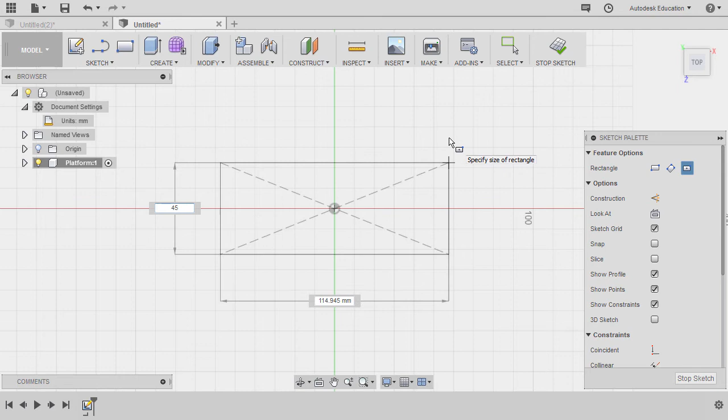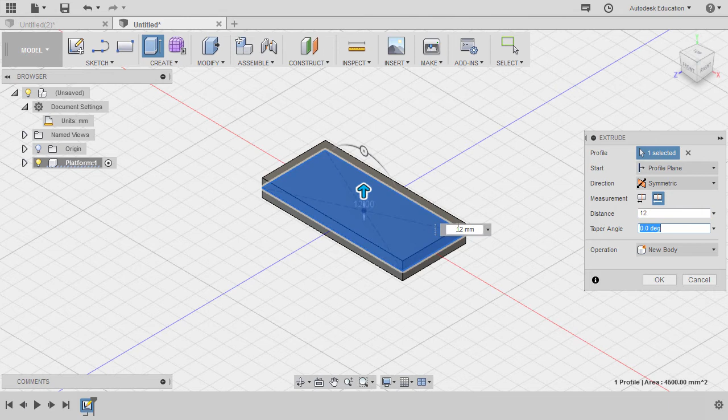Changing the rectangle type to center. Let's drop our center point at our origin. Keying in 45, hitting tab, 100, hitting enter, and hitting E for extrude. Let's select this profile. For direction, let's select symmetric, and for the whole length, it will be 12. Operation new body, hitting OK.

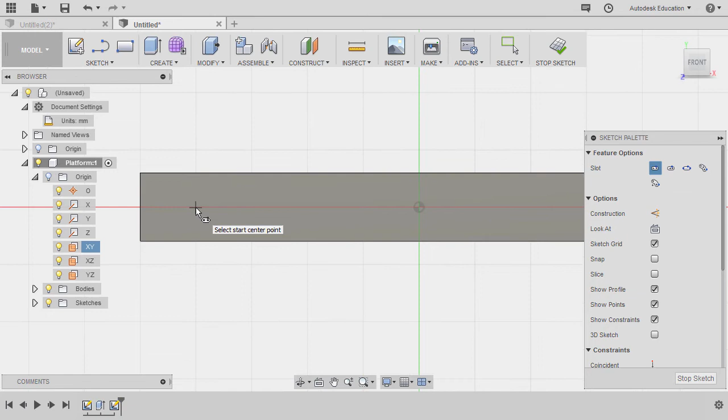Let's sketch on our XY plane. Going to XY, right click and select create sketch. Heading to sketch, let's select center to center slot. I'm going to create our slot here. Left click, and left click. Hitting escape and hitting D to grab our dimension. I'm going to select this point and this point. Key in 25, hitting escape.

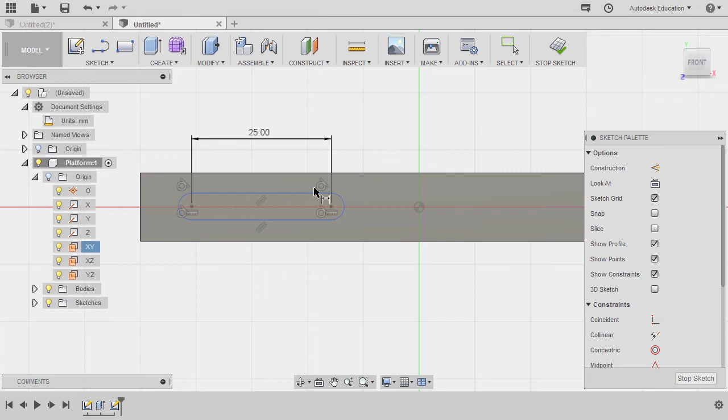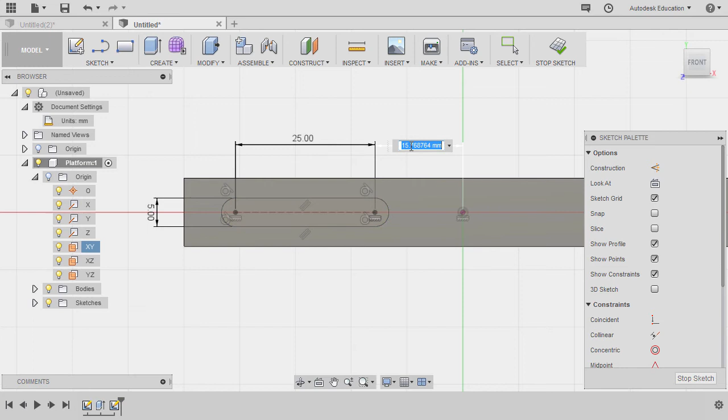But first, I'm going to make sure that both of these center points are aligned horizontally. So selecting horizontal, vertical, selecting them both. Hitting escape, hitting D once more to grab our dimension, selecting this horizontal line, dimension to be 5, hitting enter. Let's grab our horizontal vertical constraint once more. Align this center point to our origin horizontally. Hitting D for dimension, select this center point and our origin. Give them a distance of 20.

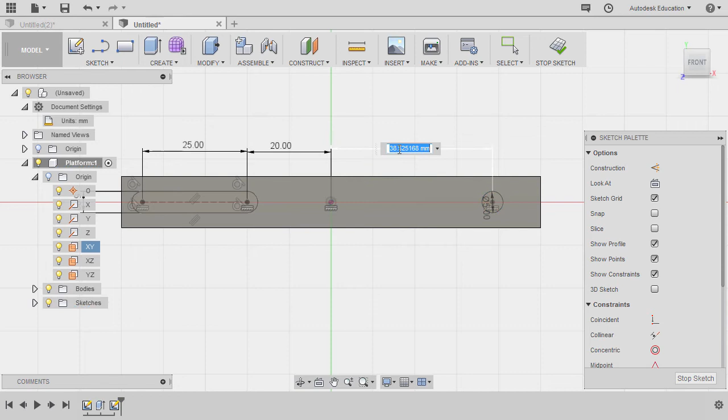Let's create the circle as well. Hitting C, left click here, diameter to be 5. Aligning this to our origin horizontally. Selecting horizontal, vertical. Hitting D for dimension, selecting our origin and the center point of our circle. Distance to be 45. And hitting E for extrude, selecting our profile.

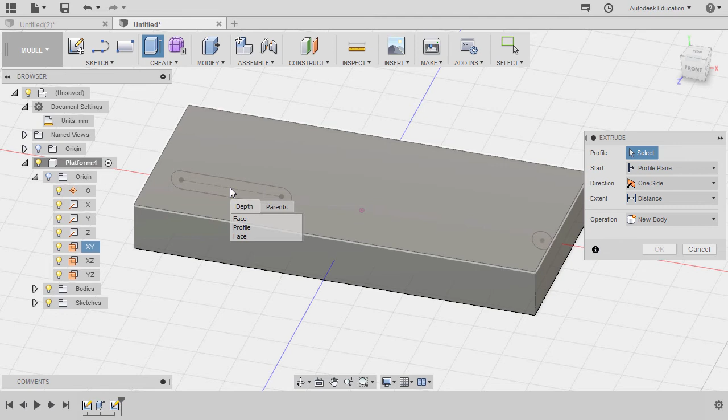In this instance, my cursor is prompting me to select this top face. In order for us to select the profile, I'm going to hold my left mouse button and a drop down will appear, selecting profile. Same here. Changing the direction to 2 sides. I'm going to grab this arrow.

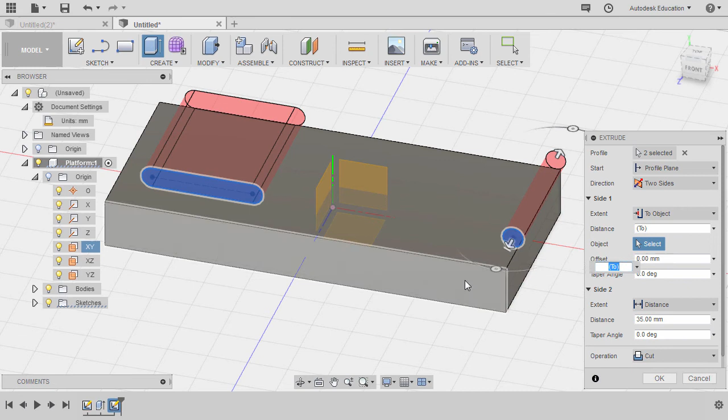Same here. For side 1, selecting this to To Object. Left click this arrow and left click this face. For our side 2, selecting To Object. Left click our arrow and left click this face. Making sure operation is cut, hitting OK.

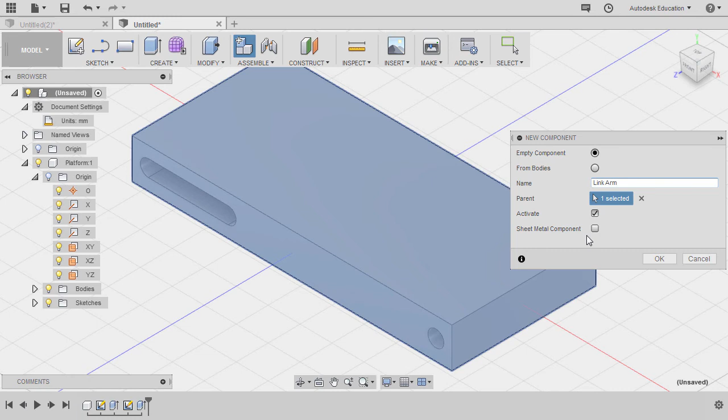Let's now create our link arm. Heading to assemble, selecting new component. Let's name this as link arm. It will be an empty component and our parent to be this unsaved, and we want this to be automatically activated, and this is not a sheet metal component, so let's leave this unchecked. Hitting OK. And we don't have any use for our platform, so let's isolate our link arm by right clicking, selecting isolate.

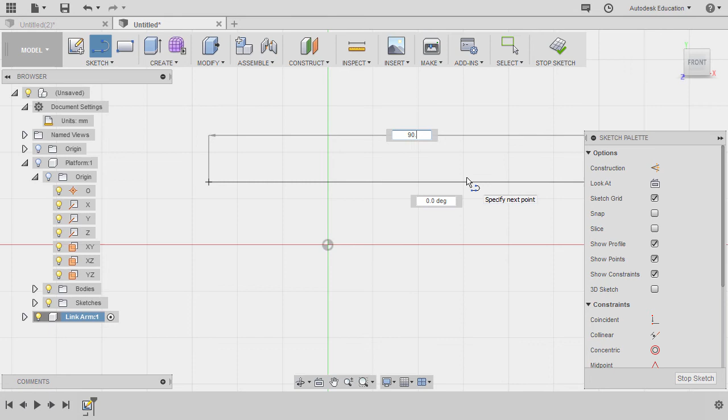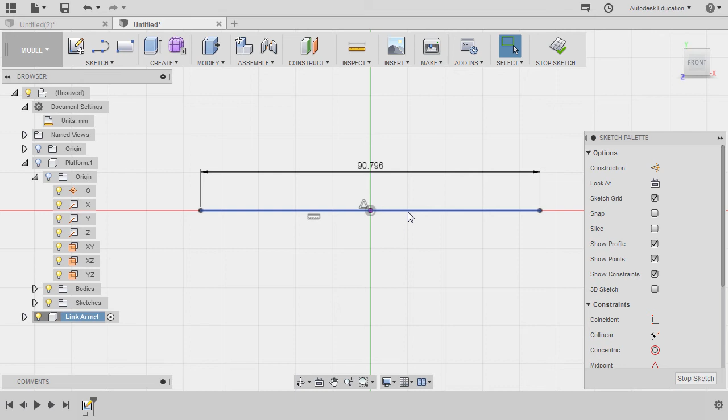I'm going to hit L for line. Let's sketch on our XY plane. Create a line with a length of 90.796. Hitting enter. Let's grab our horizontal vertical constraint, making this horizontal. Next, let's grab our midpoint to make this line midpoint to our origin. And this line is a sort of a guideline, so let's make this as a construction line, hitting X.

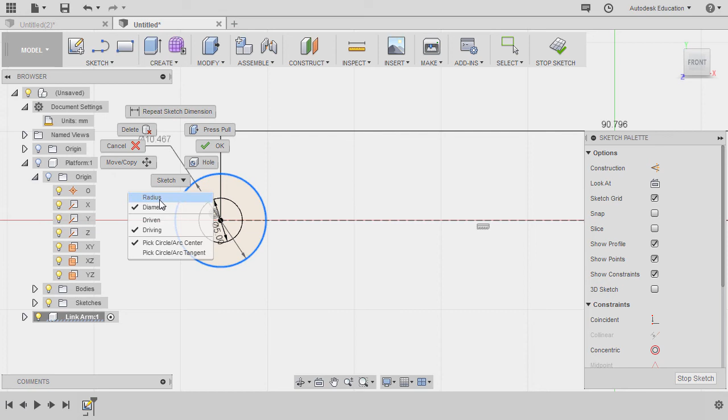Let's now grab our circle, hitting C, creating two circles. The value for our inner circle to be 5, hitting enter. Let's create another circle. This time I will not input any value, so left click, hitting escape, hitting D for dimension, selecting our circle, right click, and let's make this to be in radius. Left click, key in 4.4, hitting enter, hitting escape, creating circles here as well, hitting C, a small one and a big one, hitting escape.

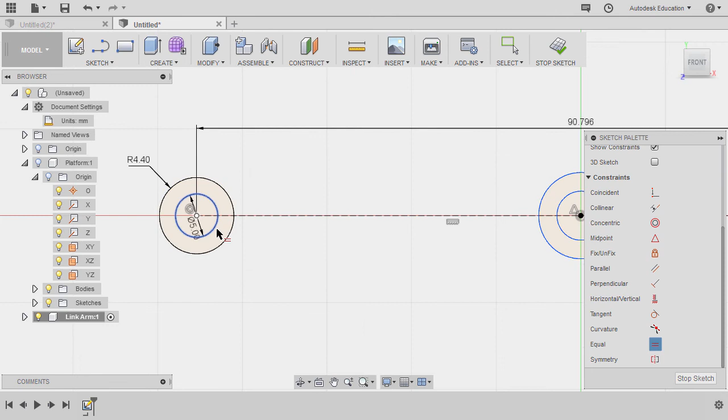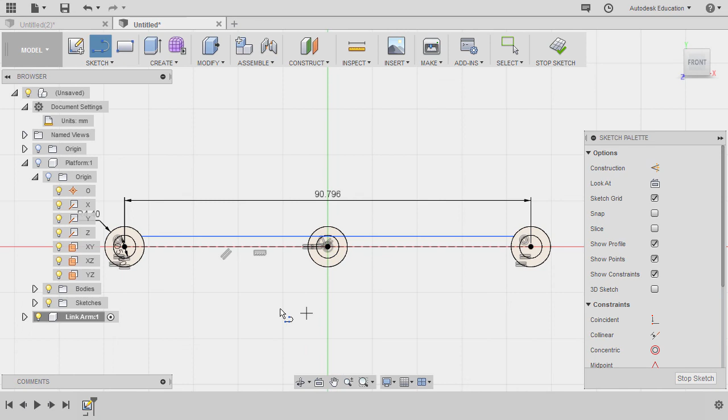Next, I want to tie the diameters of the circles to be equal with our circles here. So I'm going to head over to equal constraint, selecting this as the parent, this one to be the child. Same here, left click, the parent and the child. Hitting escape and hitting L for line. Let's create two lines from this intersection going to this circle, from this intersection going to this circle.

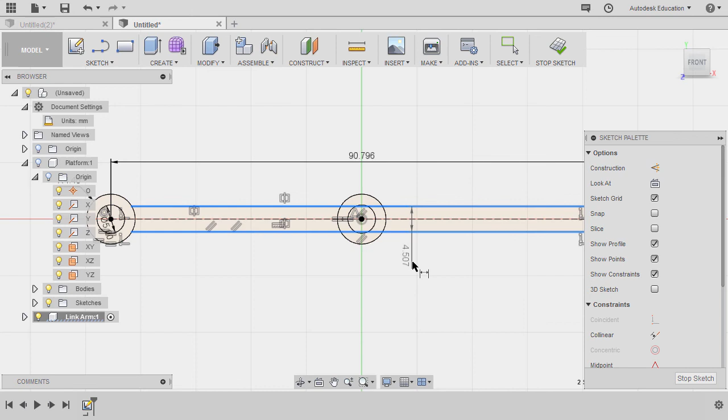Hitting escape. Let's make these lines, this one and this one, to be symmetric. Selecting this line, control left click and control left click our construction line, right click and select symmetric. Hitting D for dimension. Let's select this line and this horizontal line, left click here, the value to be 4.5. Hitting enter and hitting escape.

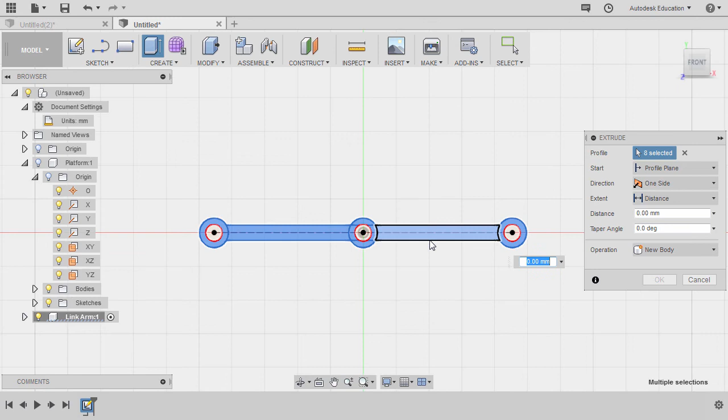Hitting E for extrude, selecting this profile, this profile, this profile. Same here, and this one. Direction to be symmetric. Our thickness, selecting whole length to be 2. Operation new body and hitting OK. Let's turn off the visibility of our link arm.

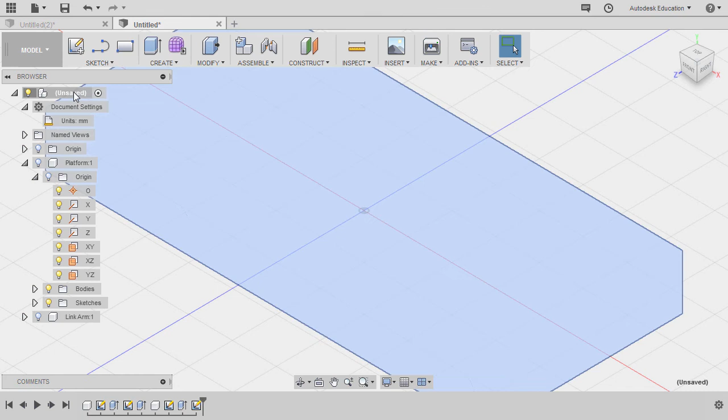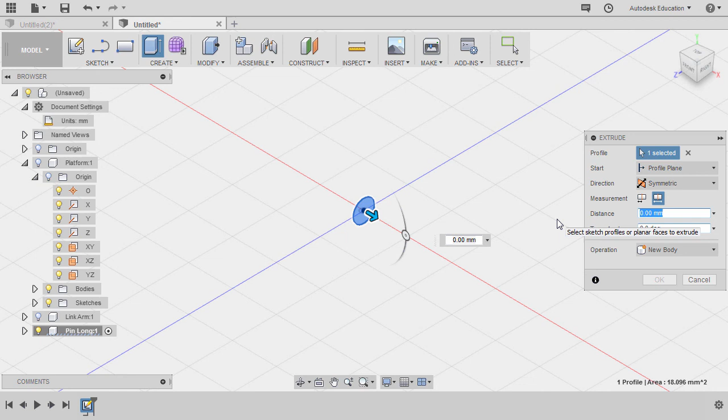Activate our main file. Right click and let's create a new component, naming this as pin long. Hitting C for circle. Let's sketch on our YZ plane. Let's drop our center point at the origin. Diameter to be 4.8. Hitting enter and hitting E for extrude. Direction to be symmetric and the whole length of our pin to be 54. New body, hitting OK. Activating our main file, right click, new component.

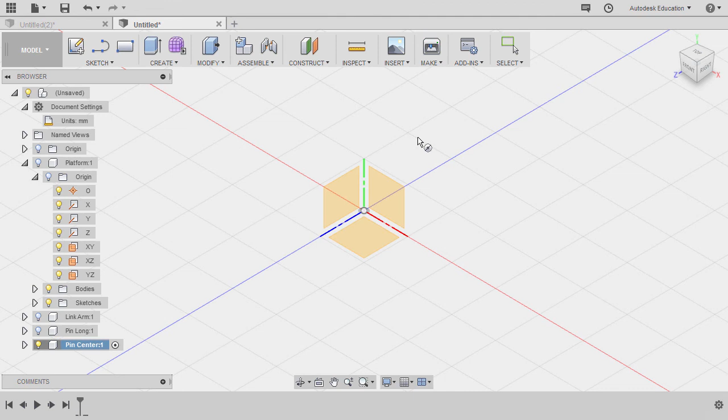Let's create our pin center. Naming this to pin center. Right click to isolate this one, hitting C. Let's create the circle on our YZ plane. Same diameter as before, 4.8. Hitting enter, hitting E for extrude. Direction symmetric, the length to be 4. New body and hitting OK.

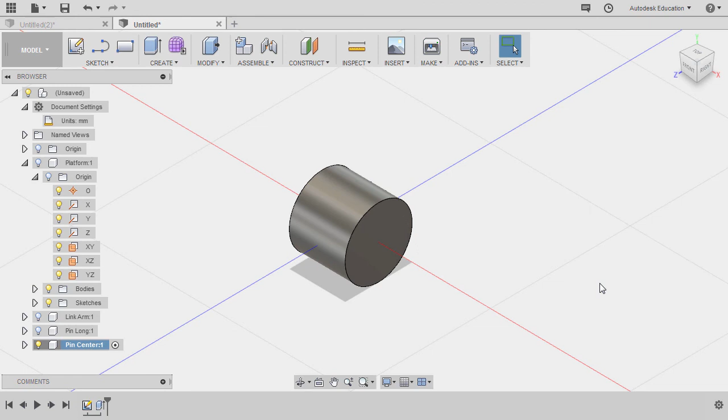Activating our main file, right click and let's unisolate all. Our parent component is our platform, so I'm going to right click and have this grounded. In the next video, we will assemble our components and add joints.